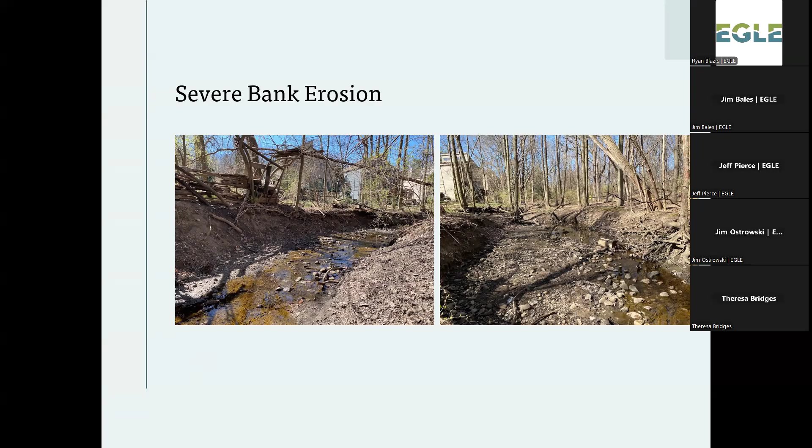These are more, and then as you can imagine, over time, these could continue and go, affecting homes and properties and yards.

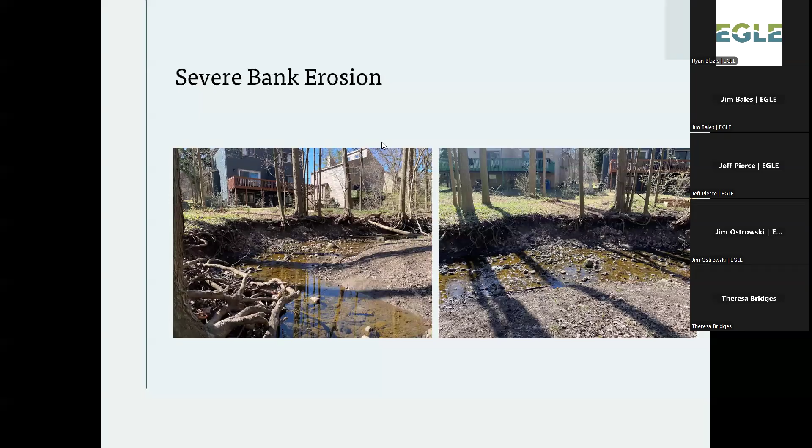Some of the characteristics of this creek is that some areas have been over-widened because an excessive amount of sedimentation has gathered. Therefore, to facilitate the flow, the flow has widened, and then it takes the sides of the banks with it.

We've got where the most upstream end at the westernmost end is a failing retaining wall, where there's a retaining wall that was built in order to provide some armoring for the creek to take a pretty drastic turn to the south, and in this area the culvert has become perched. It's eroding out from underneath the culvert, so that is putting that culvert in jeopardy for the future.

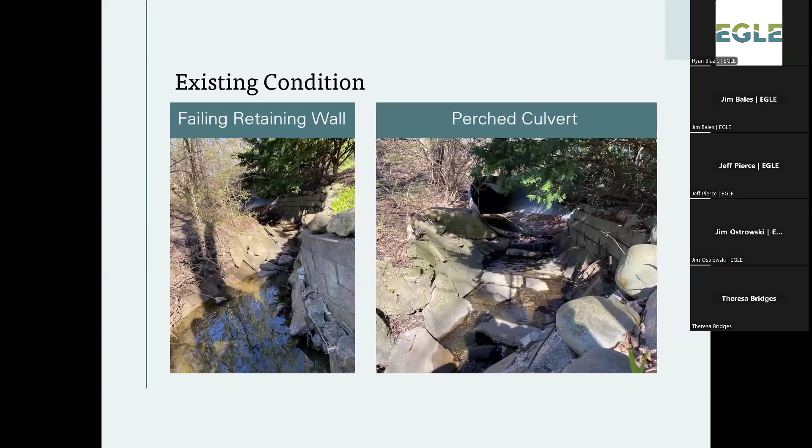We also have sanitary sewer running through the area, so these large manholes can be seen. One of the things that our plan addresses is to armor with riprap, with large stones, to ensure that the stormwater will not erode around the manhole and end up revealing more of it. We need to keep it protected.

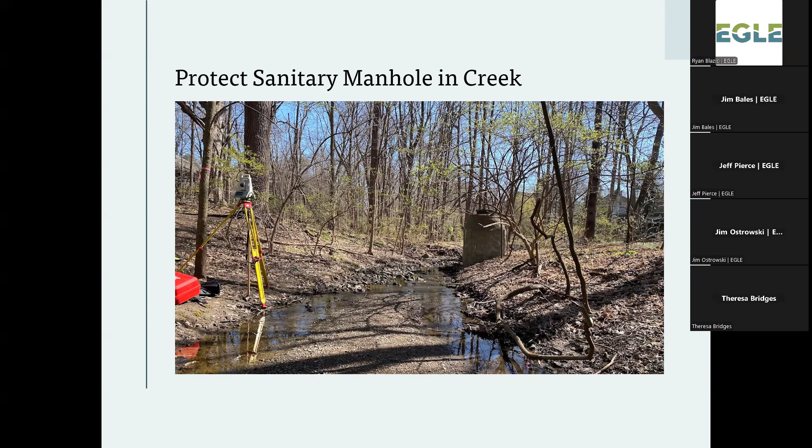And then some of the trees have fallen. That's par for the course with what happens with erosion, is that it takes the land and the trees come down eventually because of their weakened state with their exposed root system.

So the creek restoration design will focus on creating a natural stream that functions for high flow volumes experienced by this section, and reducing erosion.

With the amount of development that has gone on in the city, even though there are detention requirements, it still has a way of bringing a lot of water to the area in this creek. There have been neighbors who have attested to it and how far it comes up their banks for their yards.

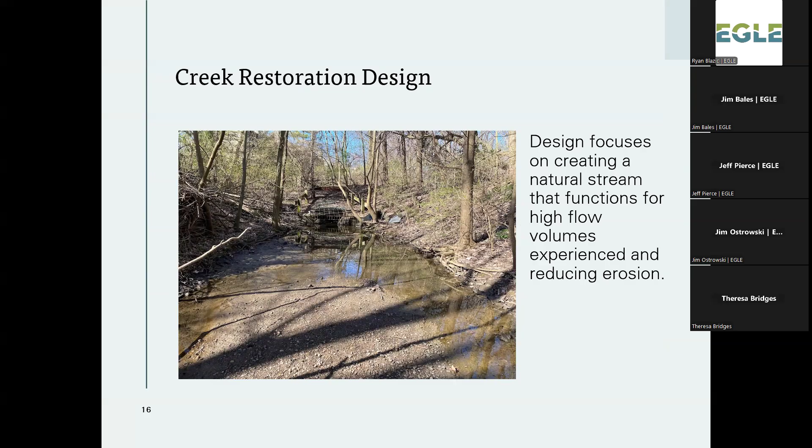So what we want to do in this project is to help settle the water to some extent and create the capacity, as well as create a uniform channel so that it doesn't have the turbulence that will take the erosion, make for erosive velocities.

So from here, this is where we pick up the maintenance portion of the creek system. It is our charge to maintain this waterway.

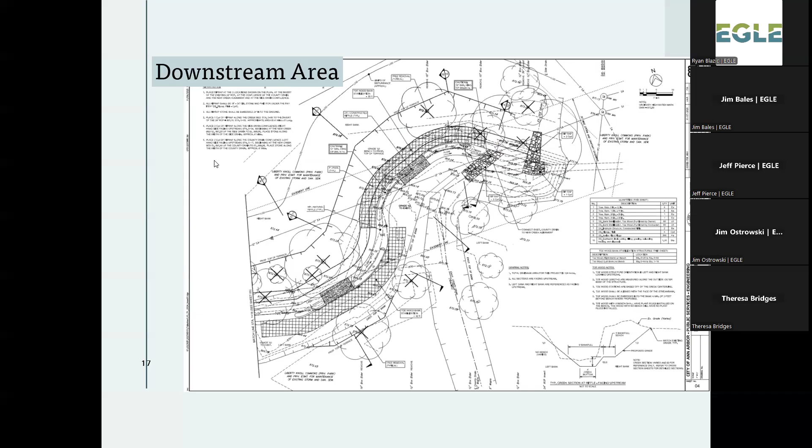So we want to make sure that we armor up, and that's what's being shown in these hatching areas is the extensive stabilization that will be installed with toe wood and riprap, and that's on the outside edge of the creek path.

But also then through the creek itself, there are hatched areas that are showing riffled, constructed riffles, which are, in layman's terms, a big bunch of stones that help to slow down the water. And then also some sediment ponds, like pockets, little sediment pockets will be formed so that where these riffles are, the water slows down and has a chance to settle out some of that sediment where it's been designed to settle out.

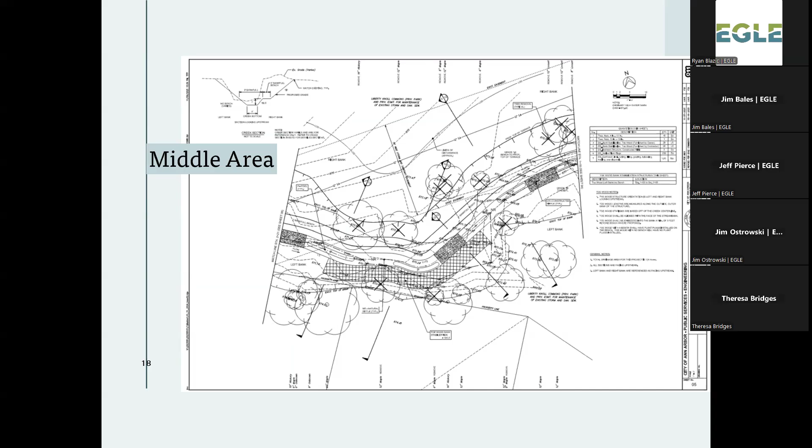This upstream area is just as the stormwater comes out of the large culvert that was installed a few decades ago. So the water comes back out of the culvert, and this is that area then.

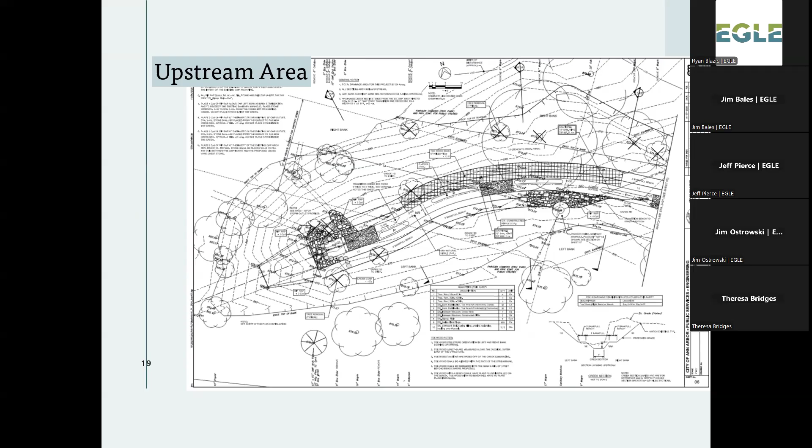We've labeled it the western upstream area. This is the area at the west end of this wooded area, and it is just east of Westwood Apartment Drive. This is where we need to remove the wall.

We have ledge rock going in, and that's these large, very large rocks in a rectangular shape that creates steps in the creek.

Additionally, we've got the cross vanes, we've got the toe wood, and many features that we are implementing in order to regulate the water, calm it down as it comes into this area, and stabilize those stream banks, as well as hold them for the future and give them a chance to grow vegetation. The vegetation will help to also settle the water down.

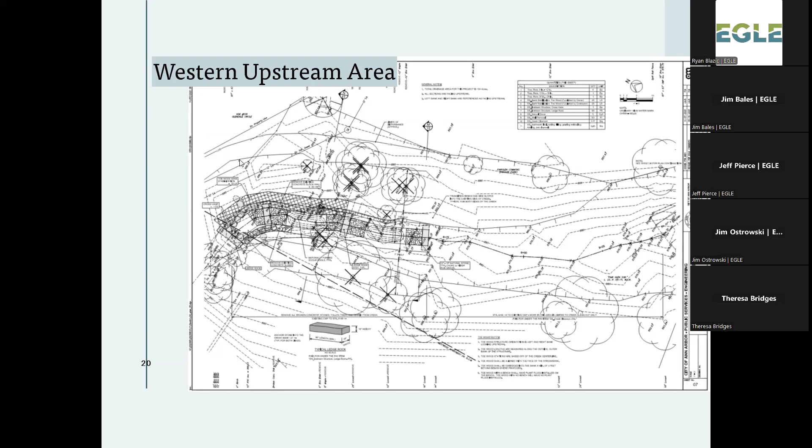The tree removals, as I've mentioned, many of the trees, in quantity, are small understory type trees. So we have 6 to 12-inch trees that we've counted to be 32 of them, 13-inch to 19-inch are 6 of those, 20 to 29 are 3, and 30 to 39-inch there are 2 of those.

We do have them identified, and most of them are not landmark trees, but we are taking into consideration landmark trees in order to get replacement trees in. We haven't laid them out exactly yet, but we do have an intention to put some replacement trees back in there to regrow some of this wooded area.

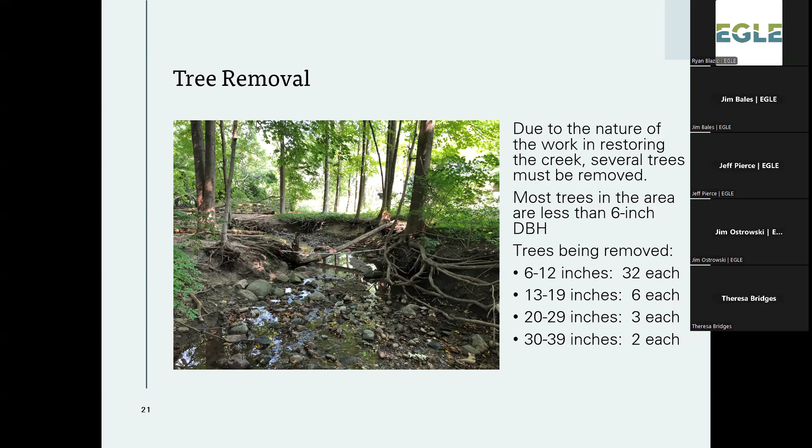Creek access, this has been a tough site to get into, so there are a few places that we've looked at. We've looked at coming through Virginia Park, and we've looked at coming through some side yard access points. The slopes are difficult, which makes it impossible or nearly impossible to come in off Westwood Apartment Drive. So we're putting some options out there to see what is best utilized by the contractor.

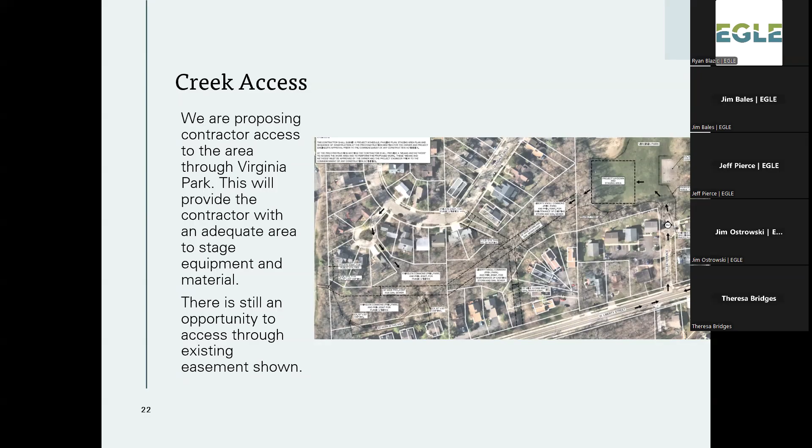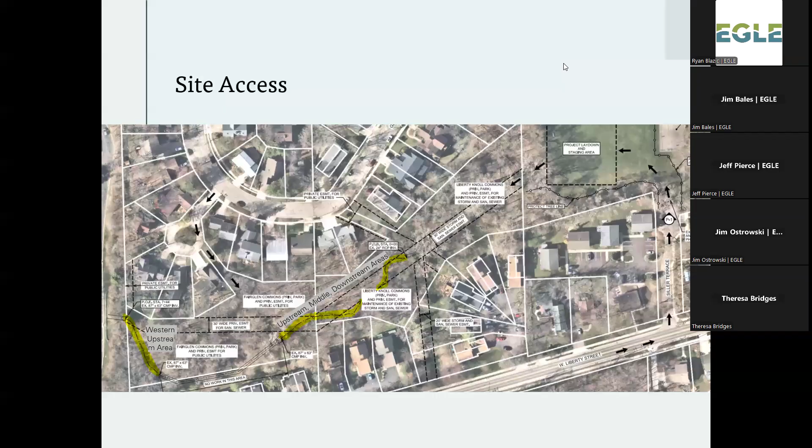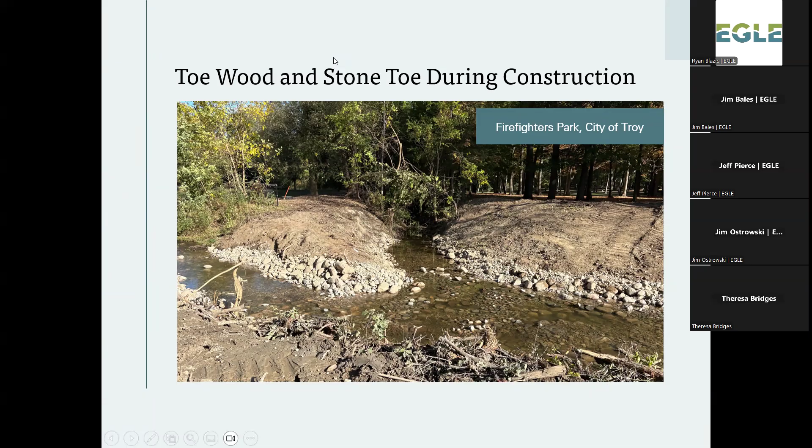Yeah, maybe I could just flip through these if they're examples of projects, if that works to be more efficient. And then if you want to say anything about them while we go through, feel free.

Yep, the toe wood, we're going to be utilizing existing wood that's on site. So we'll dig that into the banks and help to use some of the existing site materials. So, yep.

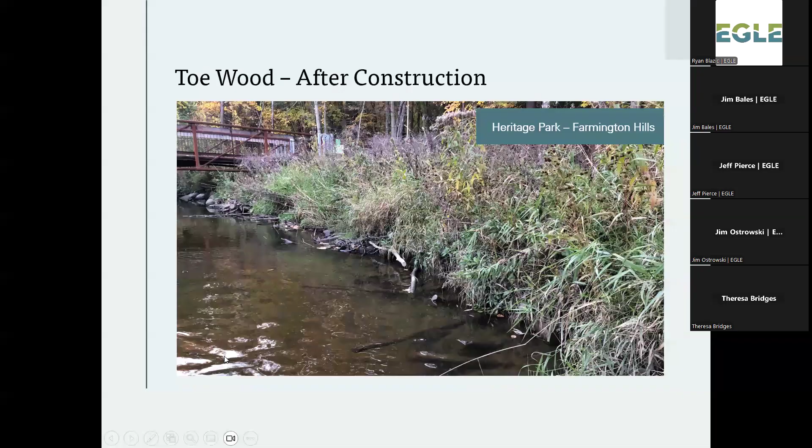And then this one's cool. It's got an underwater feature. If you go back one real quick, the underwater to the left is what it looks like when it gets submerged, and that feature is great. Yep, I guess that was it.